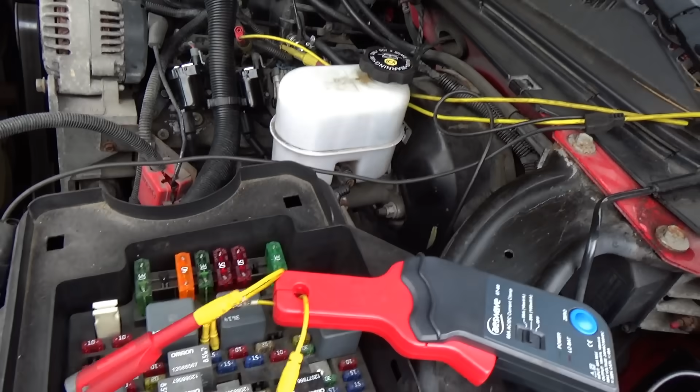I can't believe it, I forgot to bring my PicoScope. Disaster. So we're gonna go old school. So channel 1 is gonna be on the ignition coil, cylinder number 3. Channel 2, injector number 3. And channel 3 is an amp clamp around fuse injector A, which feeds the whole left bank coils and injectors.

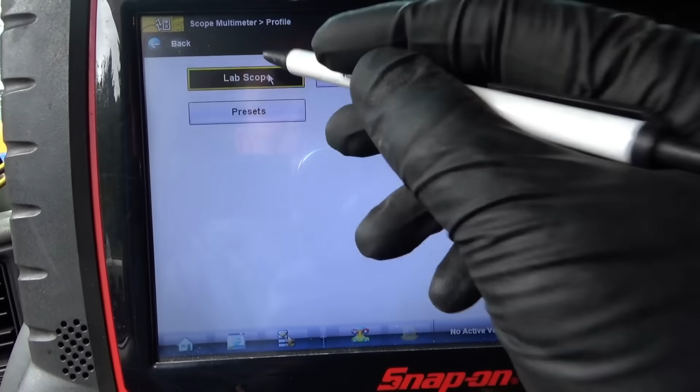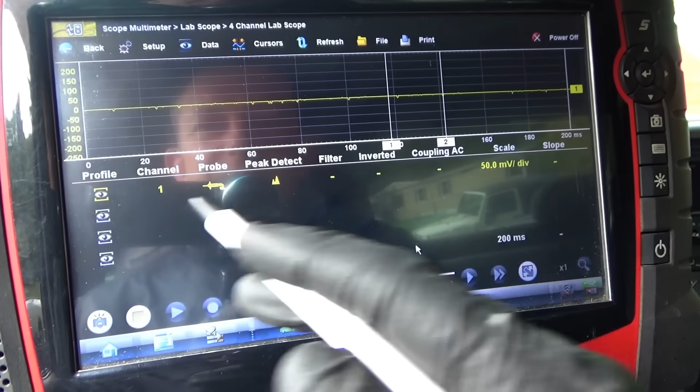Let's fire up the Verus, go back in time, see if we can still use this, if I remember how to use the scope. Alright, here we go. Lab scope. 4-channel lab scope. Oh man, this brings back some memories. Let's turn on all 3 channels.

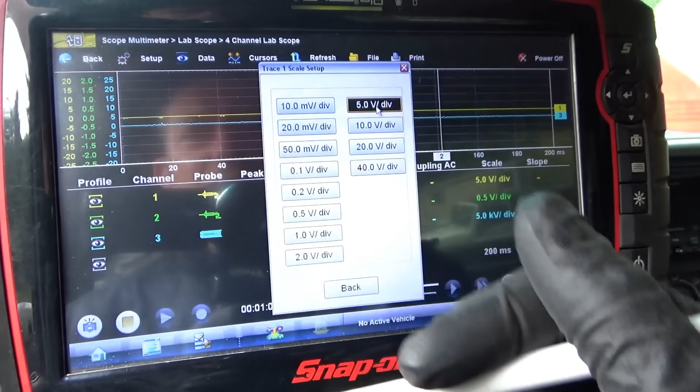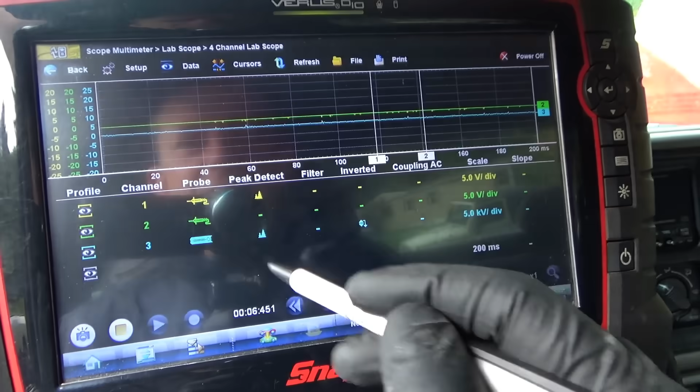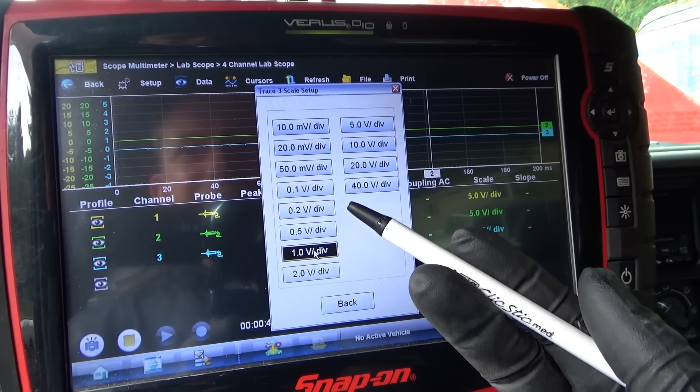And this one we want, let's see, 2 volts per division, 5 volts per division, 0 to 20. Same for the green, 5 volts per division. And the blue, we want, let's say, 2 volts. Oh, this is ignition scope. We want just regular test leads, volts DC. 5 volts per division. Let's do 1 volt per division. 1 volt is 10 amps. We can even knock that down a bit. So it's going to be 10 amps. Okay.

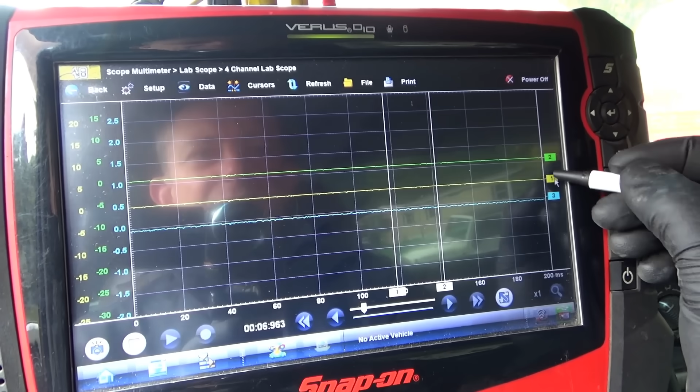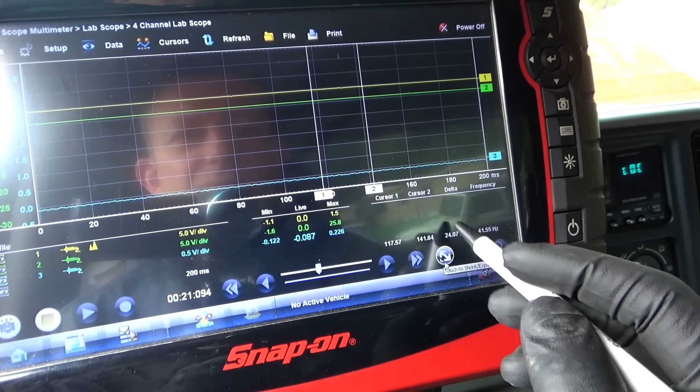So this is our current right here. Well, let's just fire it up, see. Yep, so that was positive. Let me re-zero that. And we'll need to increase our time base. Well, 200 milliseconds is pretty good. Let's do 500. Get a little more data.

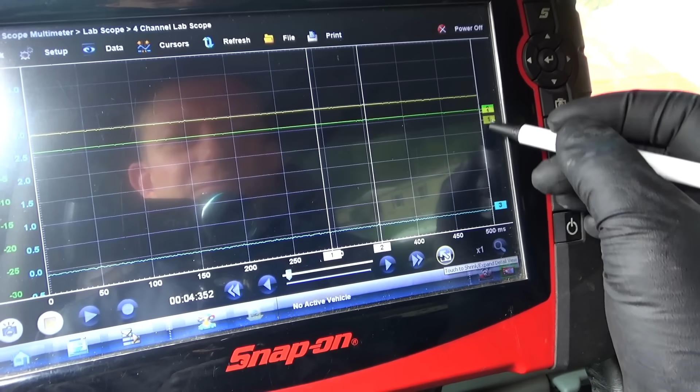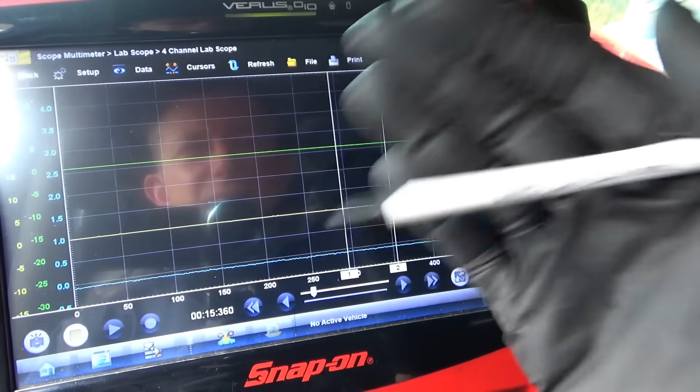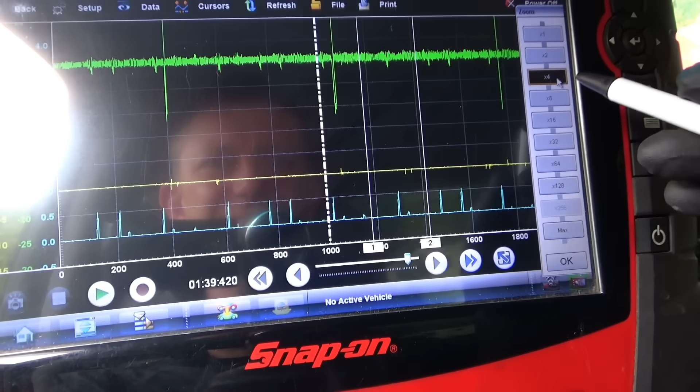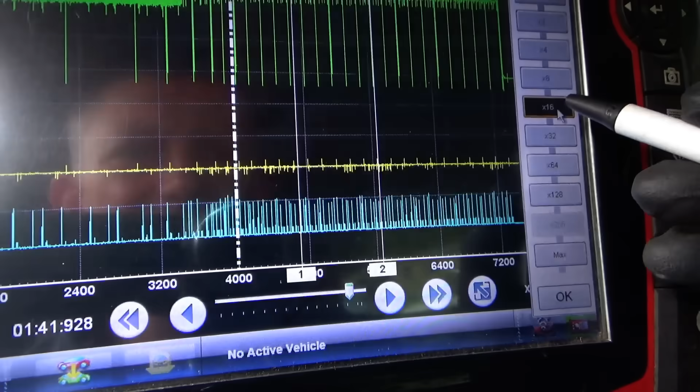So my channel 1, I expect to see 12 volts on there. Let me double check that connection and re-zero the amp clamp. Alright, we're back. 12 volts. Pause that. Zoom out. That was a long crank and then it fired up. I'm not seeing anything on the control wire for the ignition coil. I need my PicoScope.

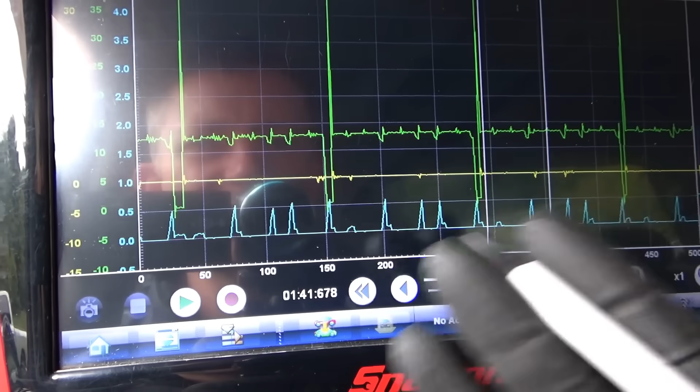So, let's see here. That's the injector. That's right here. 1, 2, 3. Where's the ignition pulse? I'm not seeing the ignition pulse. Let me double check number 1, see if that's connected. So this is what happens when you don't have your favorite equipment. Things don't go well because the leads are a little short and they're pulling out of the connectors. So there we go.

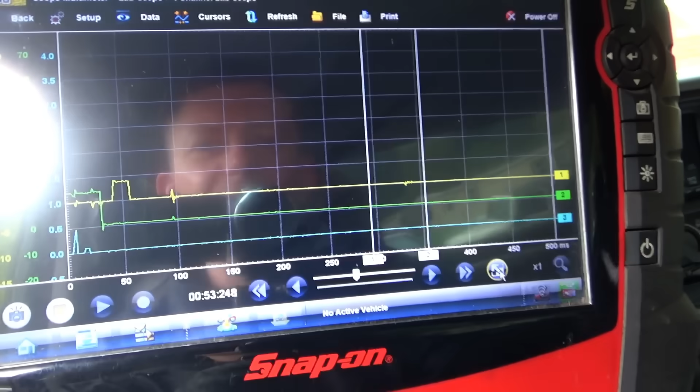Okay, pause that. Now let's zoom in. So first was no start, then it fired right up. So you can see right there is an ignition trigger. So at each ignition trigger there should be a nice, it looks like a 5 amp current ramp. That's fine. The injectors were being pulsed.

We can measure the pulse width of the injector. For example, right here. Use our cursors, and we want to see 7 milliseconds. Okay, that's fine. Should fire up. You see how painful this is compared to a PicoScope, right? And then it actually fired up right here. Ran fine, ran smooth.

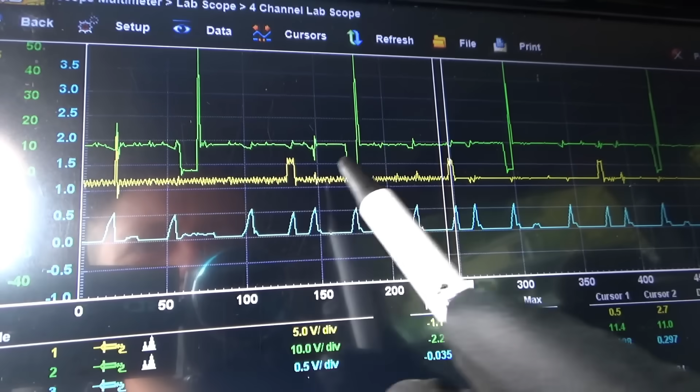Where are the injector waveforms compared to the ignition? I want to see if the synchronization is also correct. So here, let's take this ignition pulse. So that's that hump. So it's kind of a pair, and then a space, one, longer space, one, pair. Just based on the firing order, we're looking at one bank. So the first one in this little pair is ignition, and the injector occurs over the third one. Okay? Now, let's go back here.

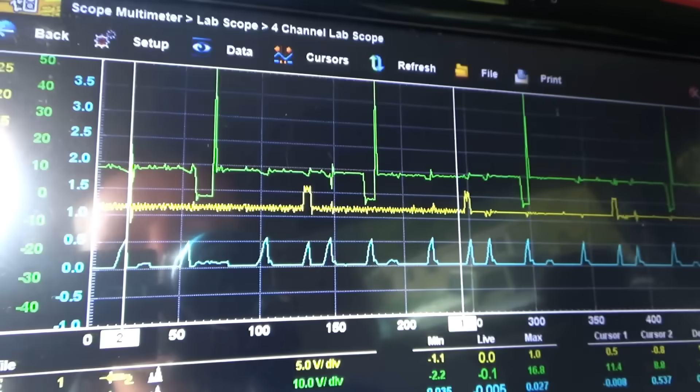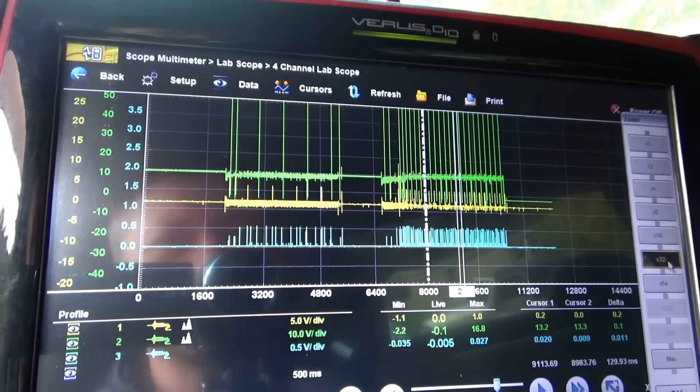Ignition is the first hump, injector occurs over the third hump. I don't see any issues. Why did this truck not want to start? Again, we can measure the pulse width right here. About 4 milliseconds. That's where the ignition's occurring. Let me save this and kind of do a little more, engage the brain muscles here.

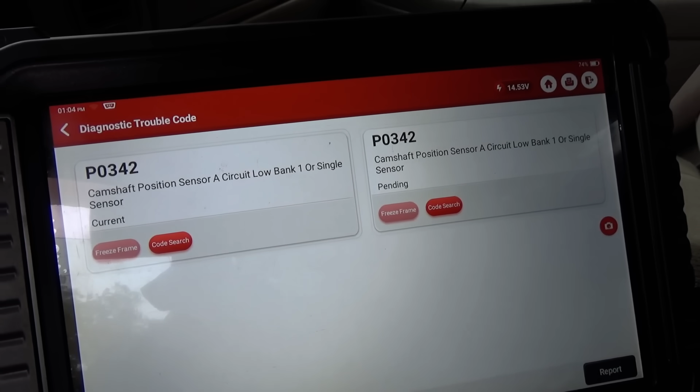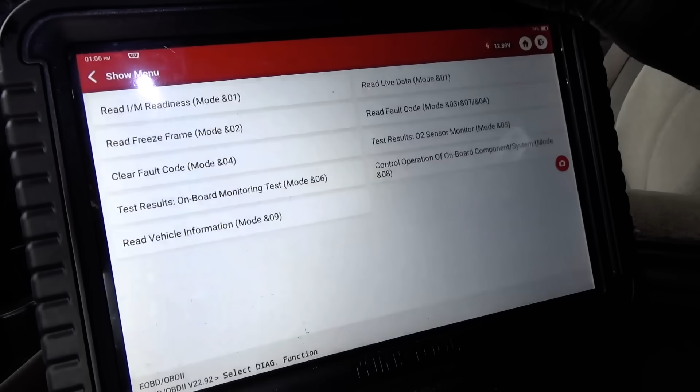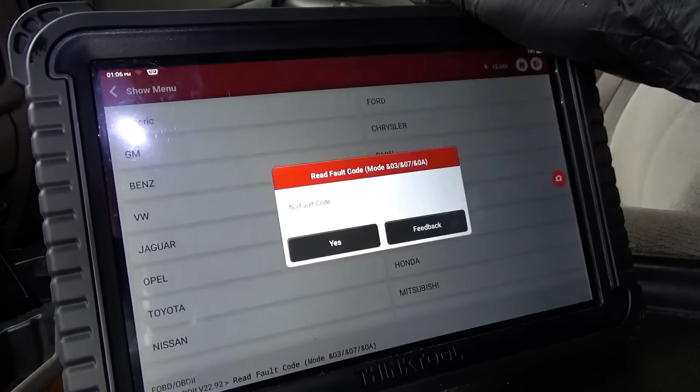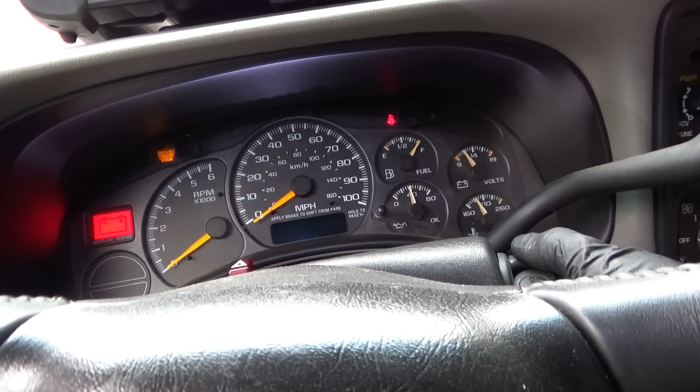Oh, this whole time I had the cam sensor unplugged. Dang it! Alright, cam sensor's plugged back in. Let's clear the fault code out. DTC is cleared. Read fault code. We should do a cam crank correlation on this thing. No fault code, yes. Okay. Same exact thing.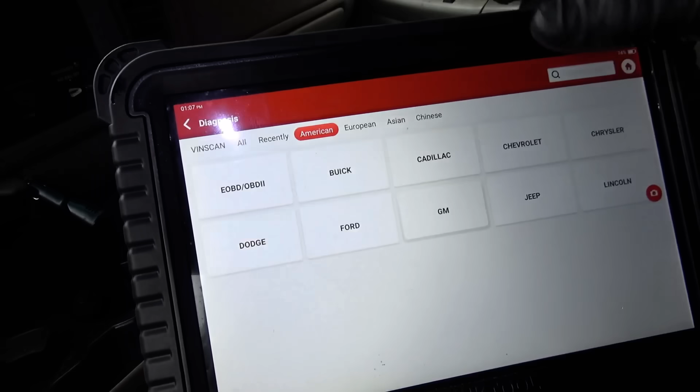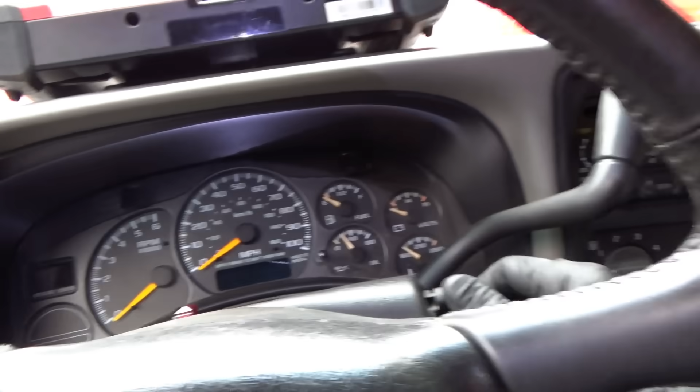Let's wait. Is it worse with the cam sensor plugged in? Oh gosh. Okay, let's try to do this crank relearn. Okay. Block wheels, set parking brake. Do not apply brake pedal, cycle ignition from off to on.

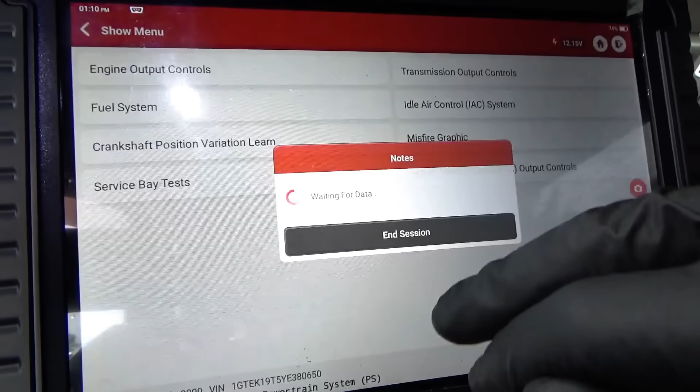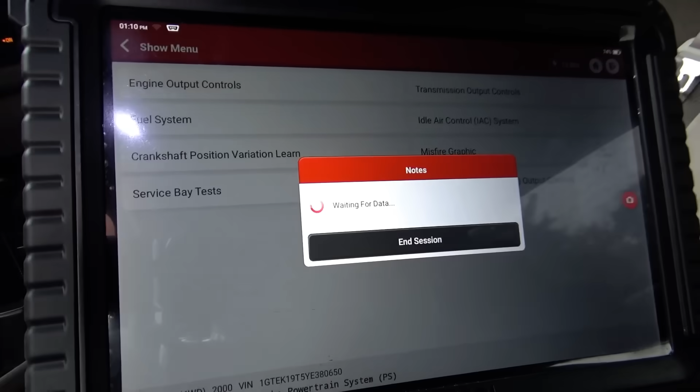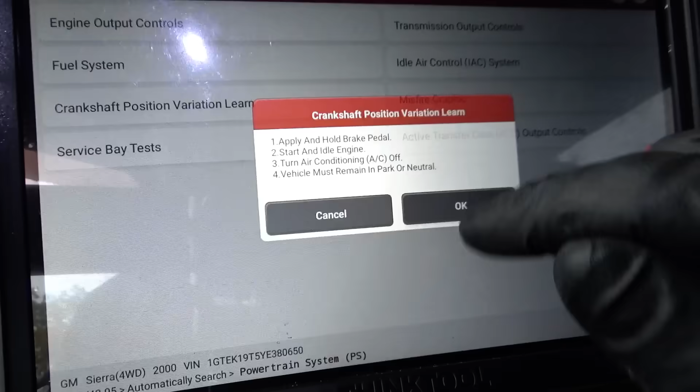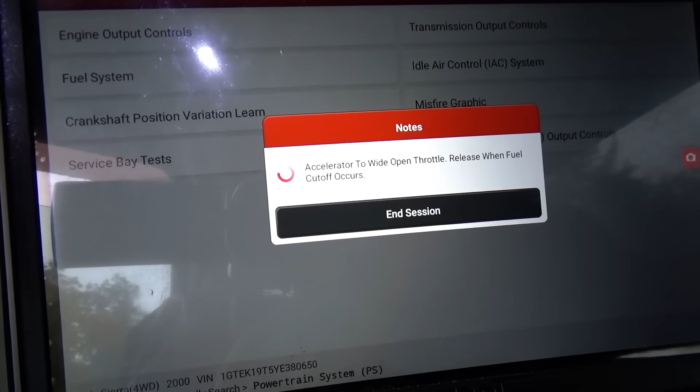It's better to do this with the Verus, which we actually have right here. Apply and hold brake pedal, start and idle engine, yes. Okay. Learn this ignition. Okay. Let's see if that made any difference.

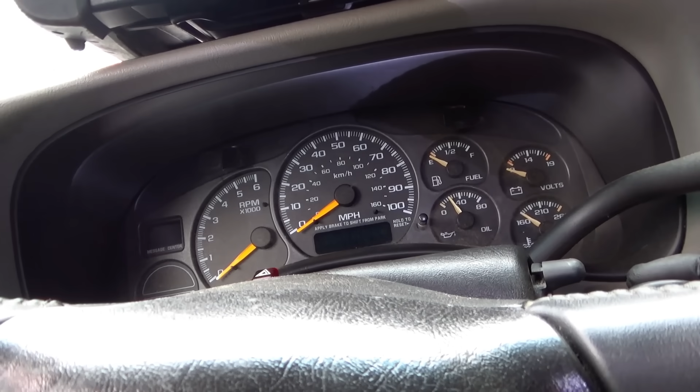This is insane. I mean, this is a really neat case study. Even though we're dealing with junk aftermarket parts, we still want to be accurate and pinpoint the root cause.

Yes, the oxygen sensors are not correct to this vehicle, so they're not going to report. It's not going to go in a closed loop. But the starting problem, I don't think that's related to that. Right? I don't.

We need some more data. We need a good scope. We need the PICO scope. We need cam, crank, and then ignition, injector, and see what happens when it starts and when it doesn't start. I think that's the only way to 100% do this. So I'm gonna go home, get my PICO, come back, wait until it stops raining, and then we'll redo this experiment. I really want to get to the bottom of this before anything else is touched.

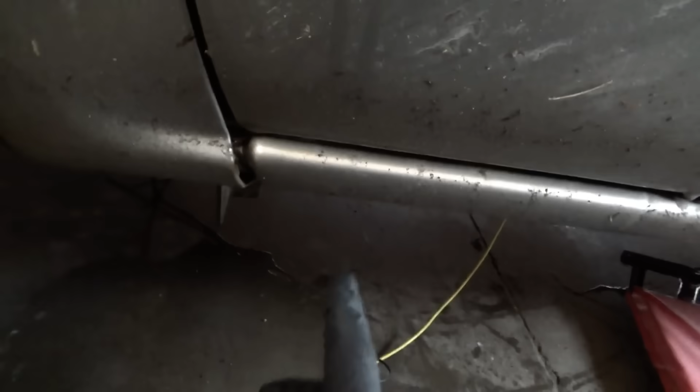Alright, so I'm back in my garage, and this is our 1999 Chevy Silverado 1500 plow truck with the 4.8. The wiring is basically identical to the 5.3 that we're trying to diagnose. So first thing I want to do is check that oxygen sensor. Unplugged it, and the ground wire in the signal circuit, sure enough, it's 5 volts. So that's known good. Now let's see if the sensor itself is grounded on that wire to the case.

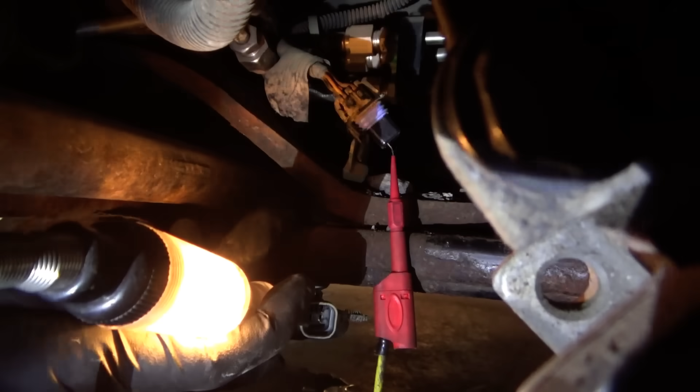Alright, here we go. So we're at the oxygen sensor. This is our wire that's supposed to be grounded through the sensor itself. So here's the pigtail. I'm going to take a test light from battery power, and on this pin it should be grounded through the sensor to the exhaust pipe. Let's see. Yes. You see the test light? Absolutely. That's a known good, so that 100% confirms that oxygen sensors are bad.

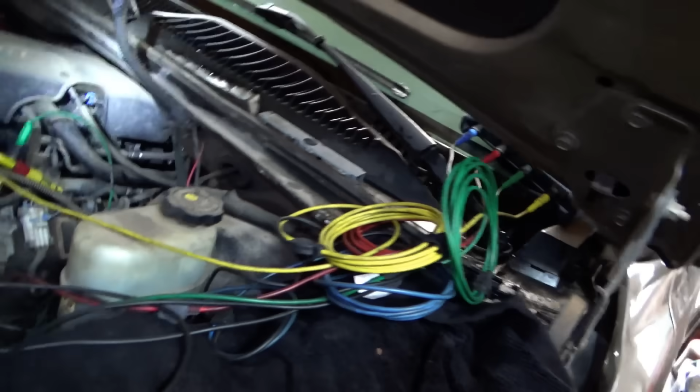However, the main customer complaint is this long crank time. So let's hook up the PICO scope to injector, ignition, cam, and crank, and get a known good capture. Alright, here we go. 4 channels on the real oscilloscope, 4-channel PICO. So what are the 4 channels? We have crankshaft position sensor, channel 1, camshaft position sensor, channel 2, ignition coil control, channel 3, that's on the number 3 coil, and finally injector number 3 control, that's channel 4. Let's fire it up and get a known good capture.

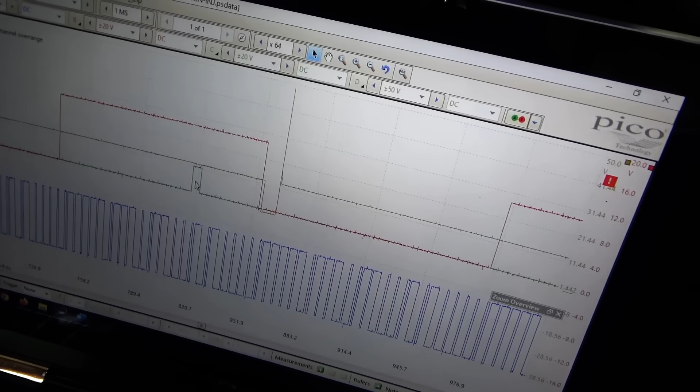Alright, here we go. Key on. That's our known good. Alright, excellent. So we have this waveform saved. You can see here in startup, the injector is fired twice, and then it syncs and fires exactly on this falling edge of the cam sensor. That's just the way it's set up on injector number 3, and the ignition is right here. So we have all 4 channels synchronized. We know exactly what to look for.

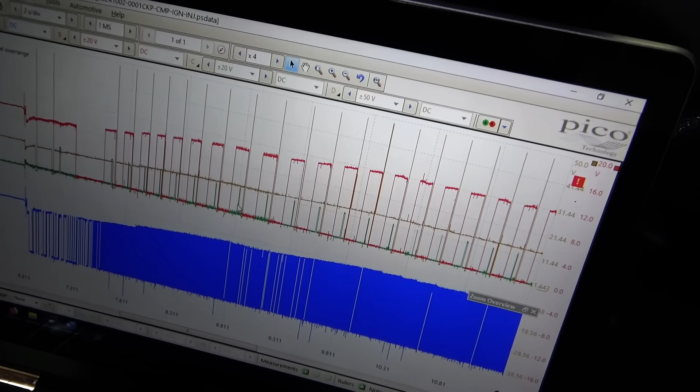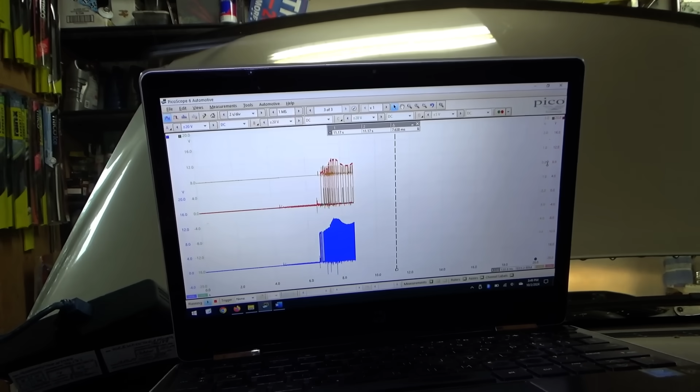Now, let me move one of the channels to that injector A fuse, and that way we can also see the current on this bank and get an extra synchronization. Alright, so now channel 4 instead of the injector, got that unplugged, and we'll put an amp clamp on here on that injector A fuse so we can see the current going to all the bank 1 injectors and ignition coils. See if I got it on the wrong way or the right way. You can even bump down the scale there. Okay, let's take a peek.

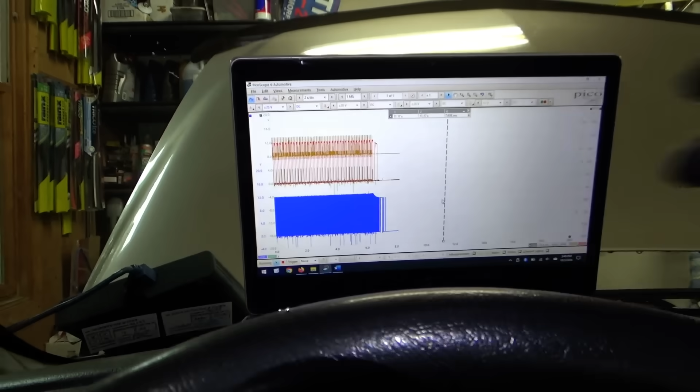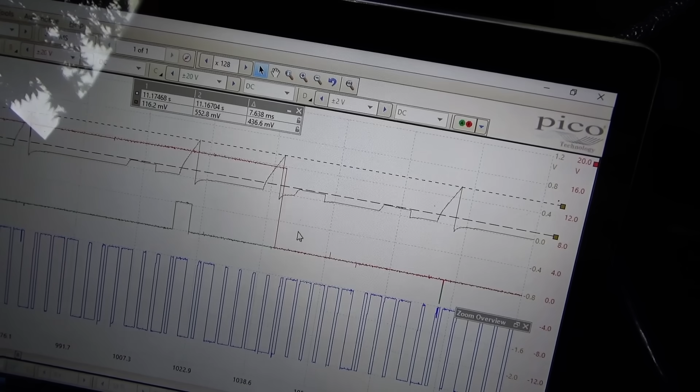Alright, so there's the current trace, the yellow. You can see when the ignition coil is triggered, we go up to about 6 amps. So this cursor right here, 5.5, about 6 amps. So that was the same as the other truck. And then when an injector fires, which is right here, we don't have it because we don't have an extra channel, that's about 1 amp. That's known good. Okay, I think that's all the data we need off this truck. Let's go to the broken truck.

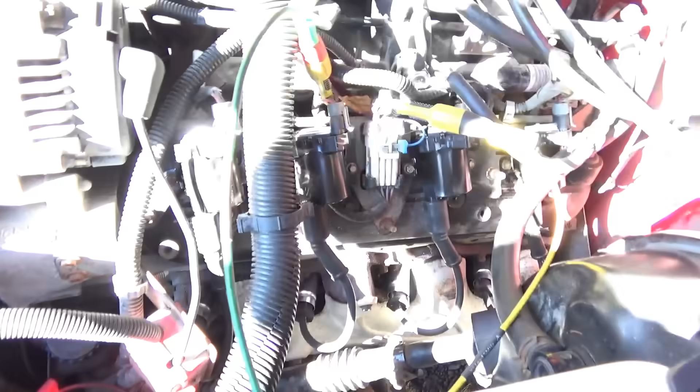Back to the GMC 1500. We brought the big guns. So identical setup: channel 1 crank sensor, channel 2 cam sensor, channel 3 ignition control, the trigger, channel 4 injector number 3 control. Let's see how it compares to the known good.

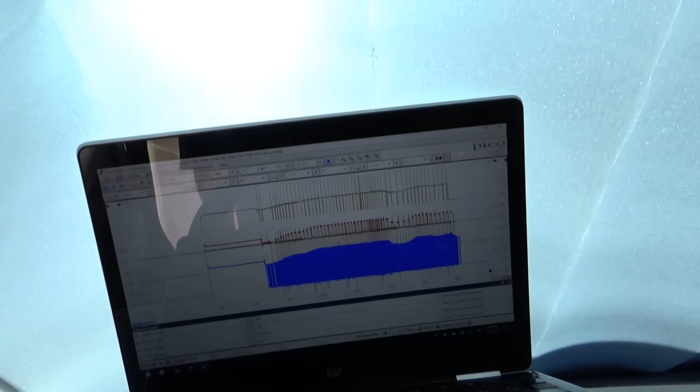Alright, so here's a saved waveform from last time. So the ignition trigger occurs during the high section of the cam pulse. The injector is right on the falling edge. Let's roll the scope, see what happens. Okay, fired right up. Now let's shut her down.

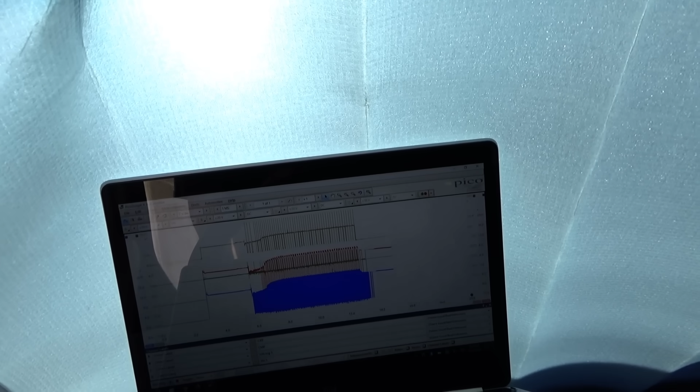Amazing. That's it, we're done. See, you guys, I told you the PicoScope would nail this in 2 seconds. Look at that cam pulse. It's garbage. So whatever AC Delco cam sensor was installed doesn't work. Well, doesn't work most of the time. Sometimes it comes back to life. Crazy. So we're done with this GMC.

Without a scope, you would have 0 chance of figuring this out. 0. How would you measure a cam signal? You can't without an oscilloscope. And to have a good oscilloscope that's easy and fast to use, if you're doing this in the field as a professional, you have to have that. Remember, I went back to the Verus. Oh my god, I should have measured the cam signal with the Verus, but we have the known good, now we have the known bad, and we're done.

So I'll tell the shop it needs an OEM cam sensor, repair the pigtail correctly, 4 new oxygen sensors, and I don't recommend keeping the Chinesium ignition coils on there. Classic Chevy truck parts cannon strikes again, and that's it.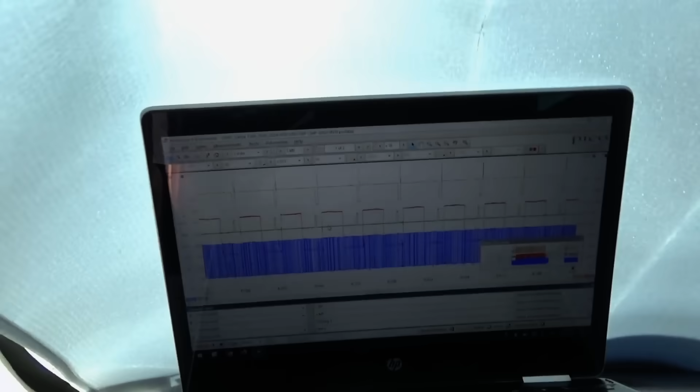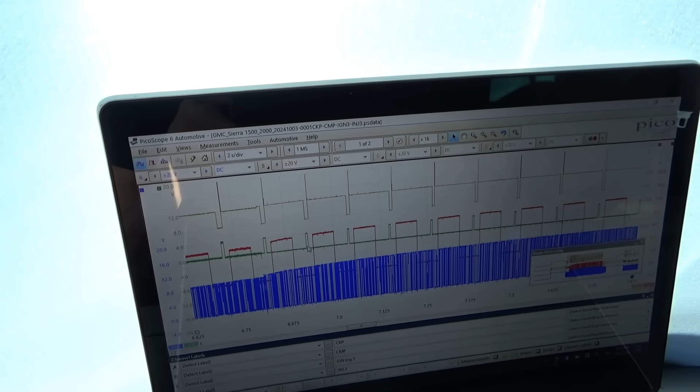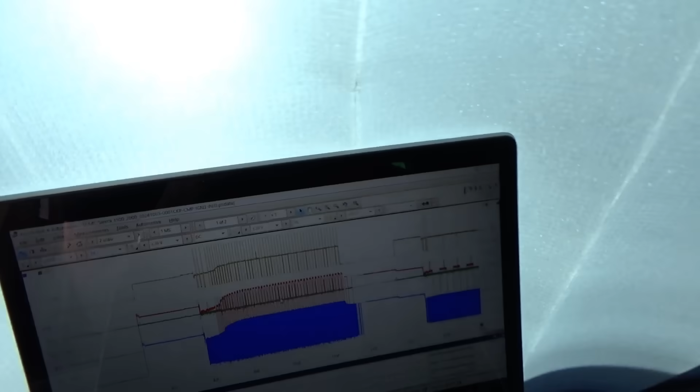A little bonus footage. Let's take a close look at the data. So when this truck fired up correctly, look, the ignition pulse was on the lower part of the cam signal. Not like our known good truck. When it didn't fire up, the ignition pulse was on the high side of the cam signal. So it's occurring on the exhaust stroke instead of the intake stroke. So this aftermarket junk cam sensor is flipping the signal around all the time.

And if you read description and operation, these trucks need a cam signal to start, but if it doesn't start on the first try, it'll actually try the ignition on the other phase, or the other 180 degrees of the cam. That's a strategy. So I said it might be a long crank time, but it should switch. Let's see if that happens. So I have this waveform saved.

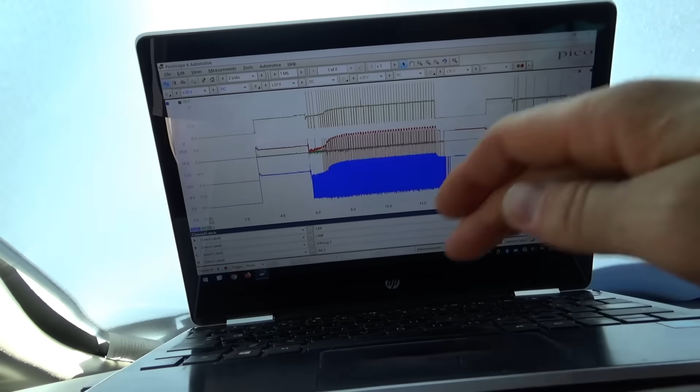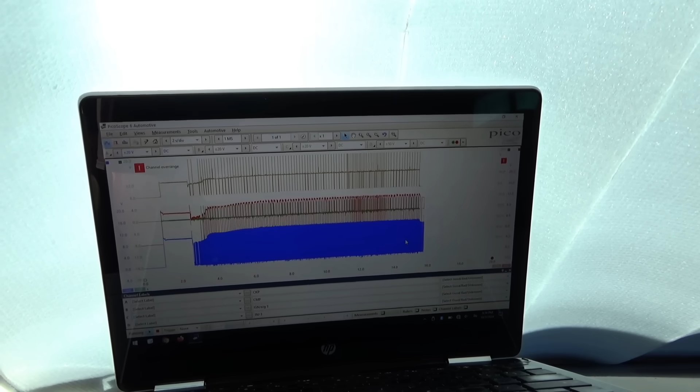Okay, fired up. Runs fine. And now let's see if it starts again. So it's not switching. Nope, still didn't switch.

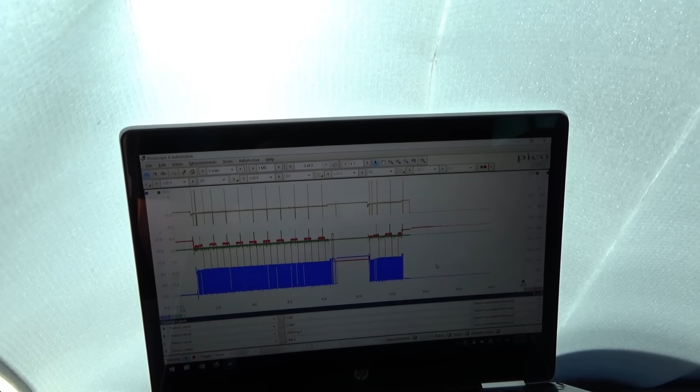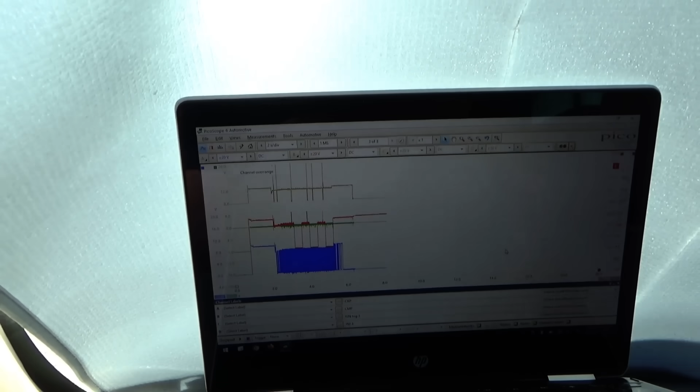So when it's trying the known good, what's programmed into the computer, it doesn't start. When it tries the reverse, 180, out of sync, it starts right up and runs. So that's computer strategy. Something's wrong with this cam sensor. That was my gut feeling all along.

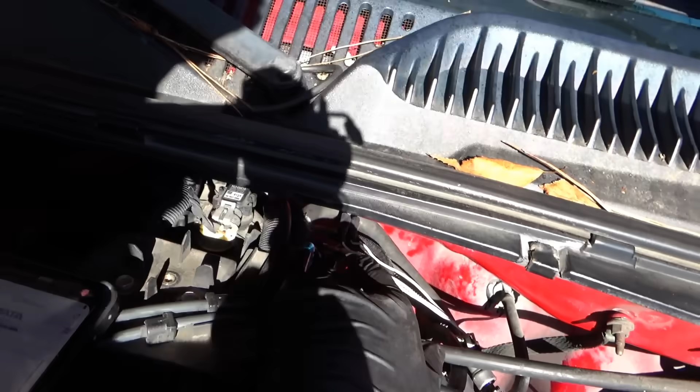It's been messed with. I'm wondering if perhaps the feed and the ground are reversed on it, because we took a picture on the known good truck. Let's double check the wiring, because the pigtail has 3 white wires. They could be swapped around. Alright, so I got the cam sensor pigtail out, and I want to match up the wiring colors here. So here's the OEM connector pin layout.

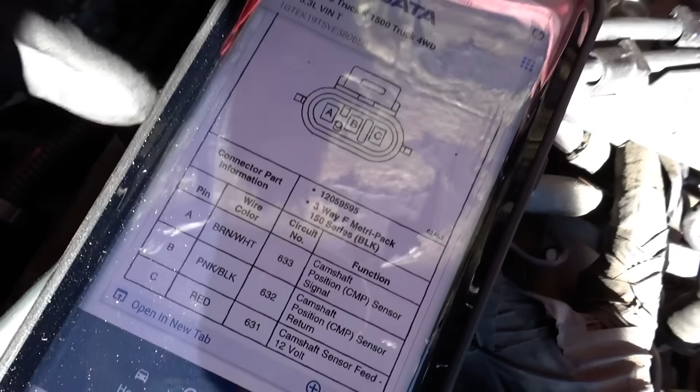A is brown and white, that's the signal. B is pink and black. C is red, if you're looking at the connector straight on like this. So we know the signal is correct because it's making its way to the PCM. So the signal is pin A, which is this wire right here, and it's going to be hard to see, it is the brown and white, yes.

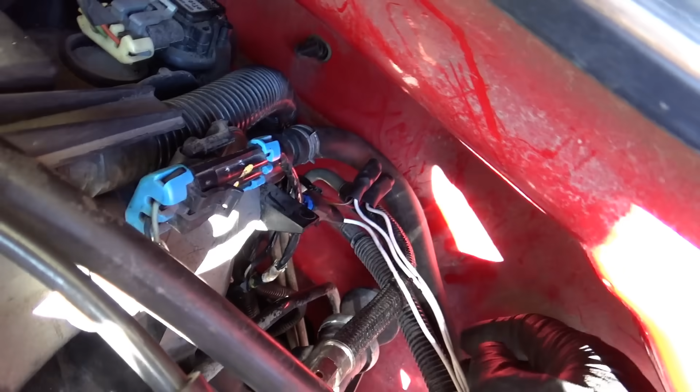So what about the power and the ground? The middle one looks like it goes to a pink and black, and that's correct. So the last one, C, has to be red, and it is red. So if this sensor, AC Delco, was bought on eBay and it flips the signal around, it's junk.

What we could try, since we already have this nice U-Haul splice job, just switch the power and ground and see if it flips the signal. I don't know if that's appropriate, but it might work. Let's give it a shot. Alright, so I got the power and ground reversed. Cross your fingers, see if it works. Alright, let's roll the scope.

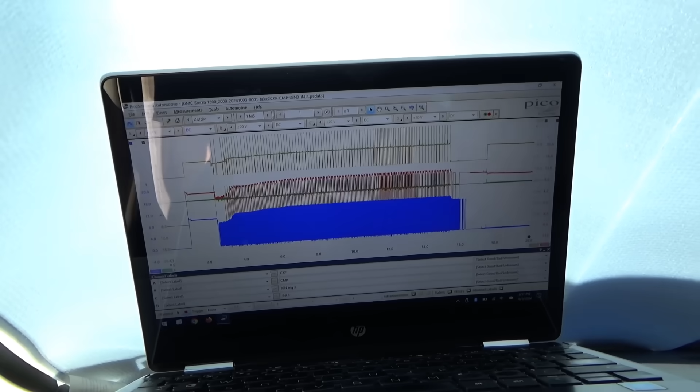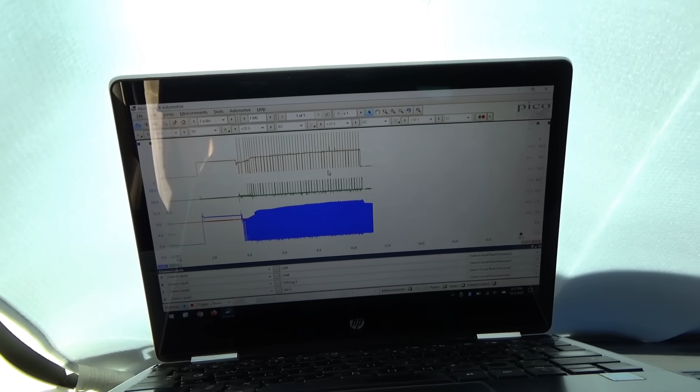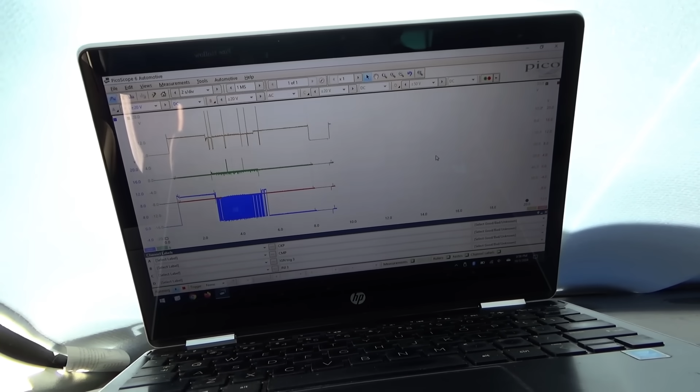Oh, let me plug in the cam sensor. It's funny, it fired right up though. It guessed correctly. Alright, moment of truth. Camshaft sensor is plugged in. No signal. It guessed right that time, but we have no signal if we switch the power and ground. So that's it. The wiring was correct. The camshaft position sensor is absolute counterfeit junk.

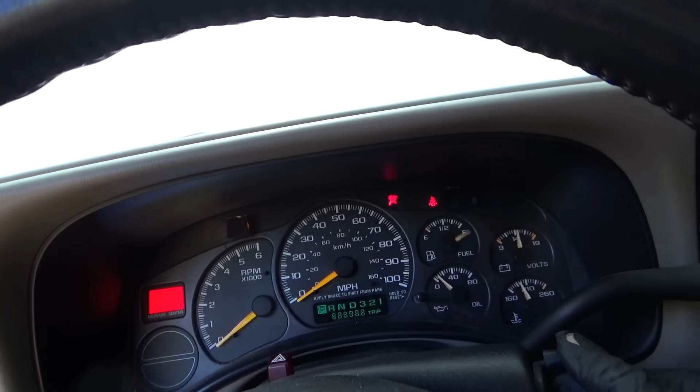Alright, so for now we're going to leave the cam sensor unplugged because it's actually more reliable starting with the cam sensor unplugged. Like that. 50-50. Moral of the story, you know what the moral of the story is.